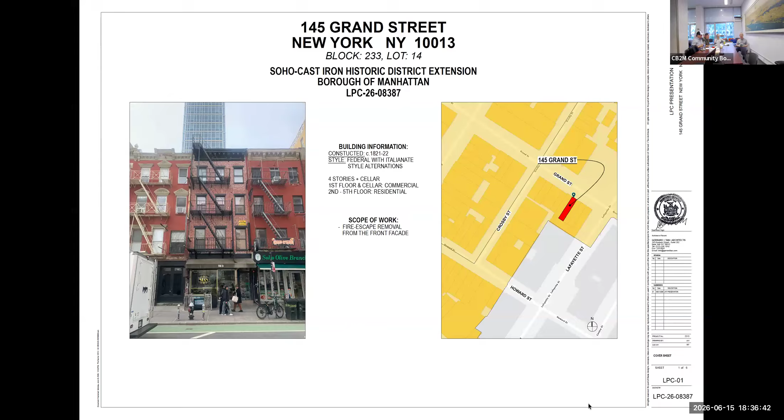We are legalizing the residential units on the 2nd, 3rd, and 4th floors. We are not doing anything to the ground floor, and we're not doing anything to the facade except for removing the fire escape. The building, under multiple dwelling law, or the loft law, states that this building, if it is fully sprinklered, which we are planning to do, is allowed to have one means of egress.

And that means of egress is the stair that is in the building. So here this shows you the location of 145 Grand.

It's in the Soho extension, and the site plan is on the right. The building was built in, I believe, 1821 to 22. It was a 2-story building, and 2 more stories, 3rd and 4th floor, were added in 1866.

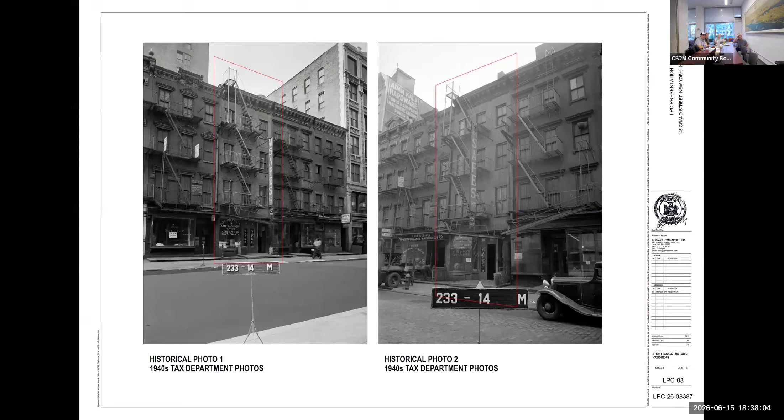At that time, there was no fire escape. Then, in the early 20th century, fire escapes were put on for safety reasons. These are the tax photographs at 145, and you can see the fire escape. The balconies, the fire escape balconies, are just simple vertical steel square sections. They're not anything ornate or designed. So there's no historical architectural features that would warrant maintaining it.

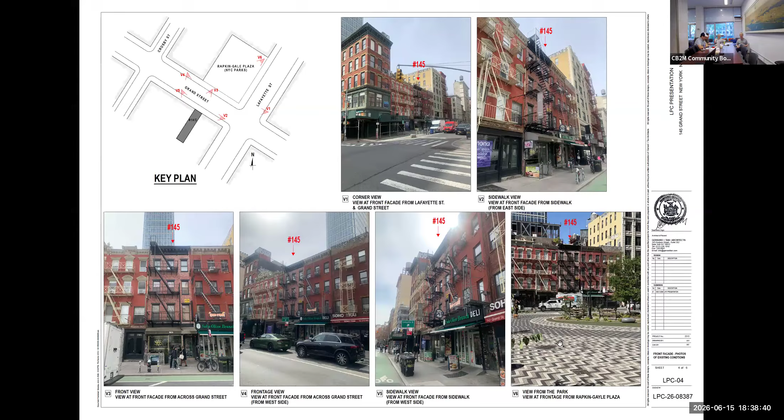And this is the current condition from the corners, from the street level, on the Crosby side street, and there is a park, Rapkin-Gayle Plaza, and we took a photograph from the furthest point of it, and you can see the building there.

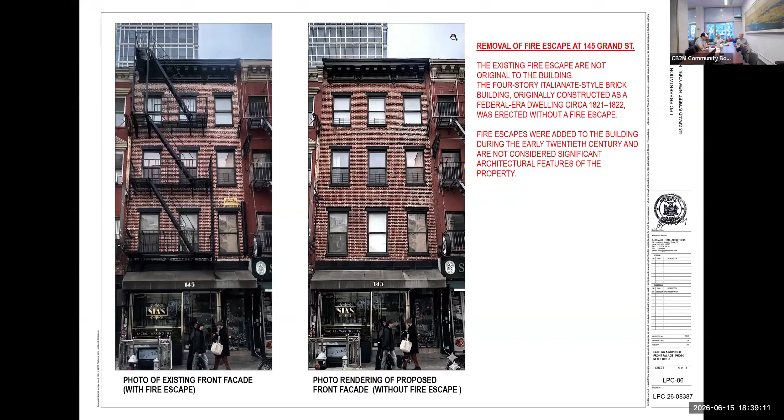This is the drawing showing the fire escape, and the removal of it is on the right. And this is a photograph, kind of photo-rendered, of the existing condition and without the fire escape. And that's it. Okay, thank you very much.

Thank you. Is there anybody in the room from the public who wants to speak about this? No, you're here for Canal Street. So, all right, is there anybody online who would like to speak or has a question about this application?

All right, Pete. Yeah, good evening. Thank you very much. I'm going to stay as a panelist. Just came up in my screen. No, you're confusing me. Okay, here we go.

I'm glad to hear the architect mention that this is an IMD building with loft tenants inside. Now, because the building is not sprinklered yet, they depend upon this fire escape for safe egress. A similar situation happened in my loft building, where we had what was said to be adequate means of multiple egress. The landlord applied to landmarks to remove the fire escape. We pointed out that it was a needed means of egress, and the fire escape remains. The application was withdrawn. So I don't understand why this landlord is making the choice to remove this fire escape when it provides safe egress to the tenants, and safe entry for the fire department.

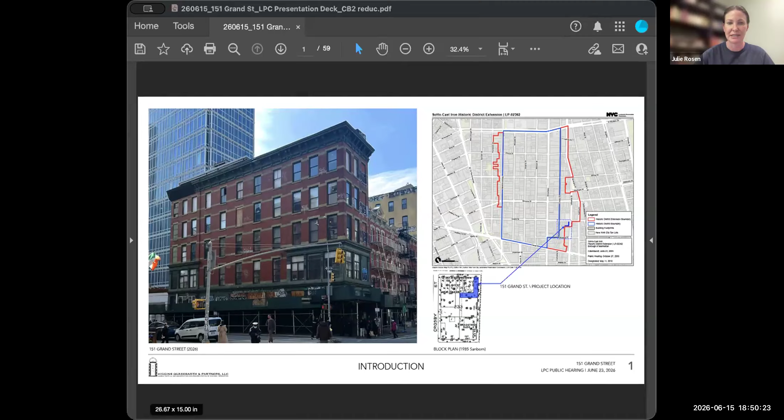So this is 151 Grand Street. You all may remember this building from our visit to you many years ago, but it's located at the southwest corner of Grand Street and Lafayette Street in the Soho-Cast Iron Historic District extension. It's a 6-story L-shaped building. It was historically a store and loft building constructed in 1889 and designed by Alfred W.E. Bloodgood and John B. Snook and Sons.

As Chenault mentioned, in 2016 LPC approved a full building rehabilitation project, which included the construction of an L-shaped rooftop addition set back from the primary facades, and a rear yard extension. Rendered views from that approval are shown here.

LPC found this project appropriate and issued a Certificate of Appropriateness permit, which has since expired, so we are now seeking the reinstatement of that permit.

Just to take you through the project timeline from when you would have originally seen this project through to today: between 2015 and 2016, the design went through a number of iterations before it was formally approved by LPC at a public meeting in August of 2016.

In January of 2017, the Certificate of Appropriateness permit was issued, formalizing approval of a comprehensive scope of work on the building, including construction of a 1-story setback rooftop addition as well as a rear yard extension to house a new stair.

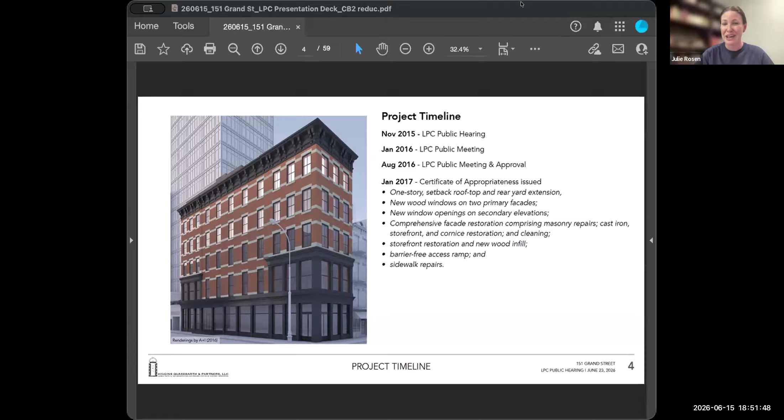The scope included new wood windows installed on the two primary facades, as well as new window openings on the secondary elevations. There was a comprehensive facade restoration scope comprising masonry repairs and cast iron repairs throughout the building, including at the storefront and cornice, as well as masonry cleaning.

There was a full storefront restoration proposed with new wood infill, a barrier-free access ramp, and sidewalk repairs. I'll take you through some of the details of those items later, but that's the high-level scope of work that the C of A approved—a really substantial scope of work, including a lot of restorative scope.

We won't require all those details because it's only the rooftop addition that's been sent to us. Well, so we are asking for—and I'll go through this—the C of A did include all of this scope, and we just want to make sure we're presenting the full scope of work to you. We are not actually proposing any design changes to the approval, but we want to make sure you see the full scope of work so we can get the permit reinstated. I understand, then I'll readjust the description of what's the case. Okay, thank you.

So in April of 2019, construction work began on the building. There was quite a bit of work completed in the first year of construction—the full building was scaffolded, and steel framing for the rooftop addition was constructed. That's relevant because I'll show you existing conditions photos with that steel framing up on the building.

All of the roof deck concrete was poured. Interior steel framing and carpentry was also installed, and plumbing work had started. But in 2020, when non-essential construction work was suspended during COVID, the project was shut down.

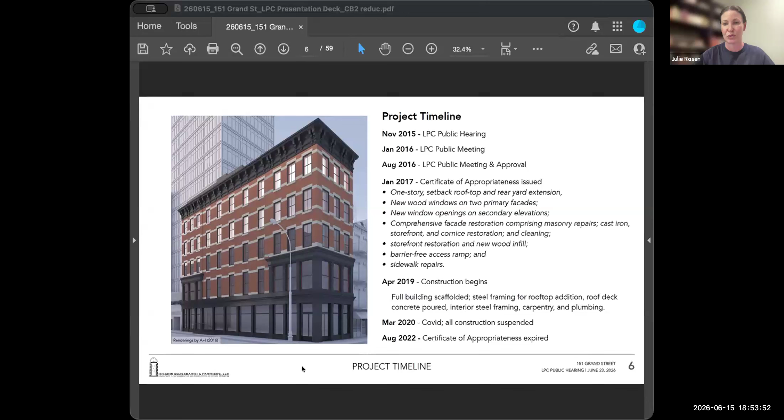The really good news is that in February of this year, the property was purchased by a new ownership entity with the goal of completing the construction per the original LPC approval. But in order to do that, we need the C of A permit reinstated so the team can pull new DOB permits and proceed with construction.

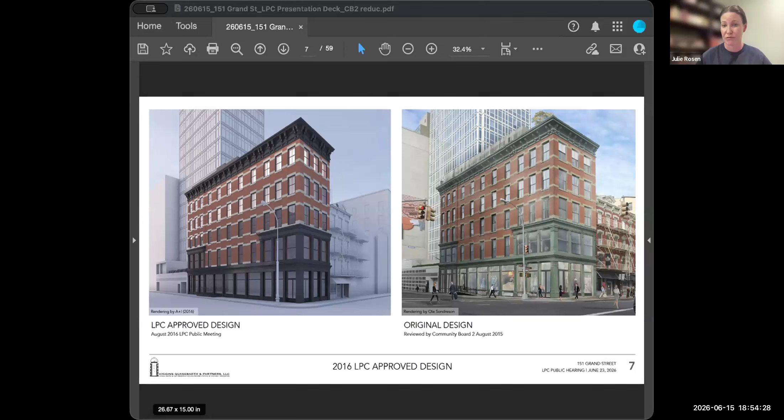The approved design, shown on the left, is what we are looking to reinstate the permit for and what will be constructed. We're not proposing any design changes. The building will continue to be fully commercial with retail use at the ground floor, and we're simply looking to pick up from where the project left off.

I just want to take you through some aerial views showing you the extent of the rooftop construction which has already been installed on the site.

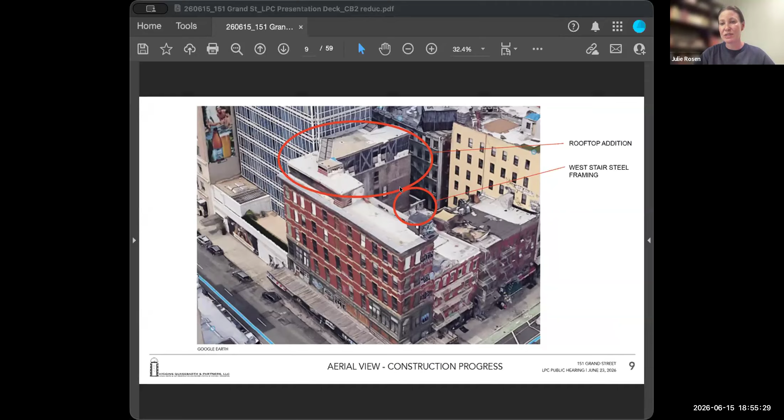So we have this aerial view, the Lafayette frontage here, Grand Street here. As I mentioned, this is an L-shaped building, so we do have visible secondary elevations here. The rooftop addition is L-shaped and it follows the footprint of the building.

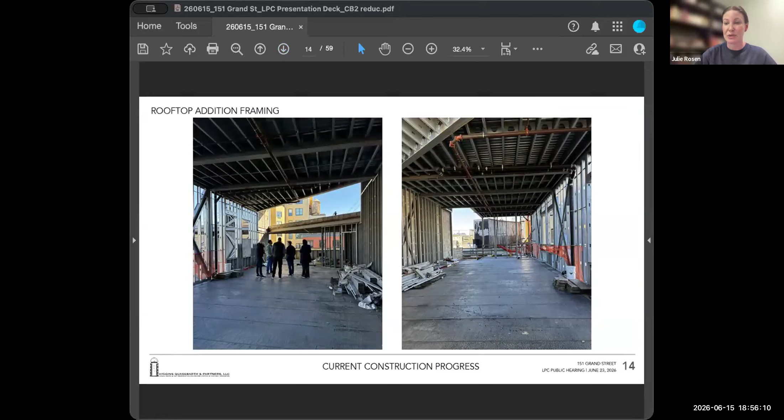These are a couple of photos from inside the framing of the rooftop addition. The project engineer has confirmed via an on-site survey and measurements that the constructed framing matches the LPC approval. So again, everything will just pick up from where it left off.

So I'll take you through quickly the approved drawings. As part of our C of A permit, there were perforated drawing sets, formal filing drawings issued and reviewed by LPC staff and perforated with their approval. So all of these drawings are forming the basis for the work.

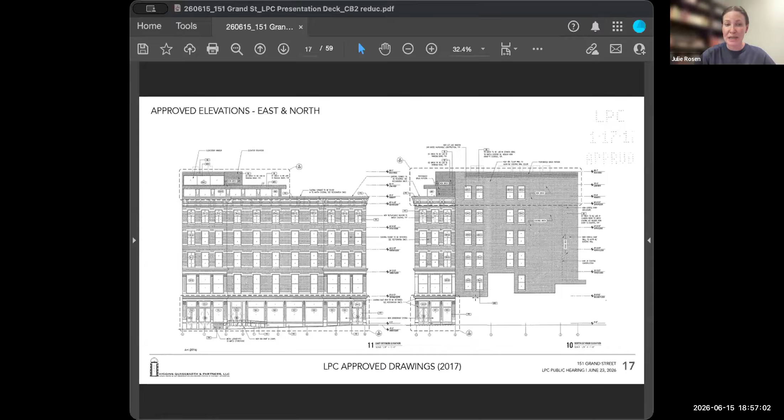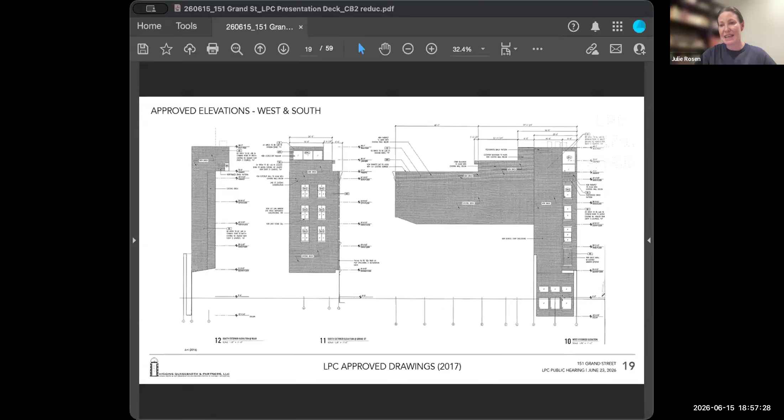In the approved elevations here, we see the new storefront infill, new wood windows matching the historic at the primary elevations. The original approval added new openings onto the secondary north elevation to add more light and air to the offices inside. And then at the roof, and we have enlarged elevations in just a bit, there's a one-story addition here with a bulkhead and clerestory on top. And then at the rear will be a new stair enclosure clad in brick.

And then at the visible secondary south elevation, 6 new window openings will be installed within the common brick wall. At the storefront, the approved scope includes new wood display windows and doors with bulkheads and transom windows, consistent with the type of infill you see throughout the historic district. The historic cast iron columns and cornice will all be retained and restored as part of the project.

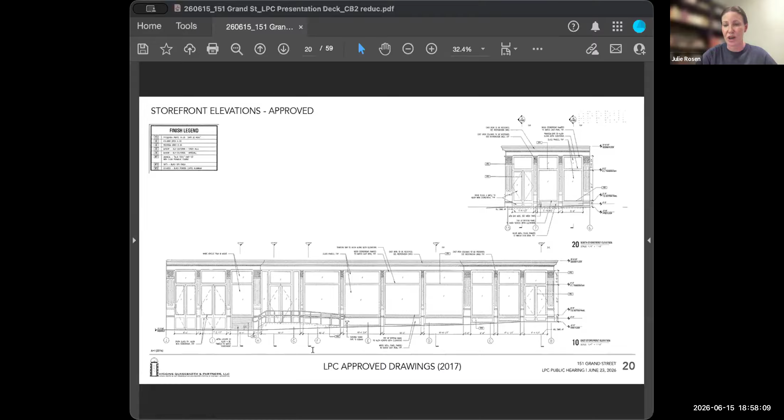And then the original commission level approval also included the installation of this new ramp on Lafayette Street to provide barrier-free access to the office entrance.

Here we have elevations of the rooftop addition. I'll start with our bottom drawing here, so this is the east facing elevation. This is what faces Lafayette Street. The addition will be clad with gray brick in this section with metal and glass infill.

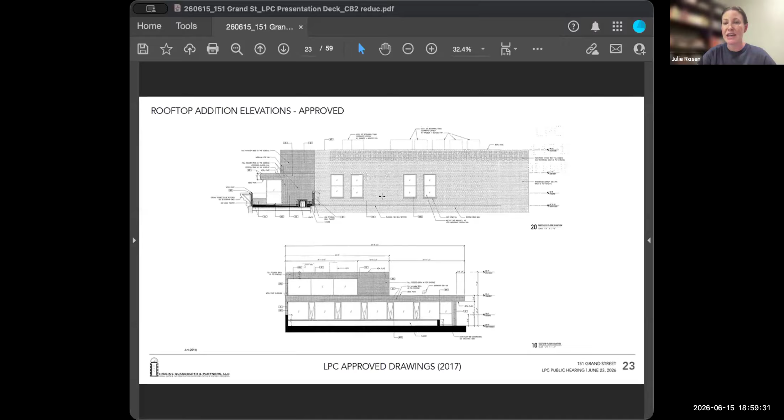On the roof is an elevator bulkhead, and then this angled clerestory that faces onto Lafayette as well. On the top here, we have the west portion of the addition. As I mentioned, in this area the addition is actually going to be a continuation of the brick wall below. So here the addition will actually be clad with whitewashed red brick to match the existing brick, and it will also have punched window openings, which are more consistent with secondary building elevations.

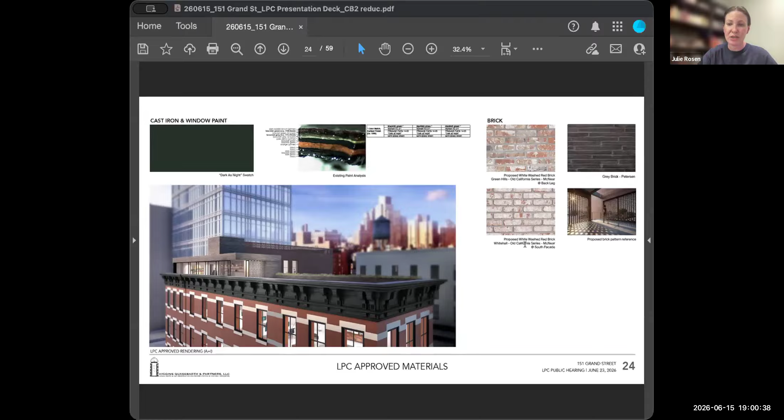For the rooftop addition, there are a few different bricks that will be utilized. For the elevations facing the primary streets, those portions of the addition will be faced with this gray Petersen brick—you can see this in the upper right-hand corner. On the secondary elevations, where the addition is rising up from those secondary walls, there will be a couple of different whitewashed red bricks utilized to get really close to the existing conditions of the walls below.

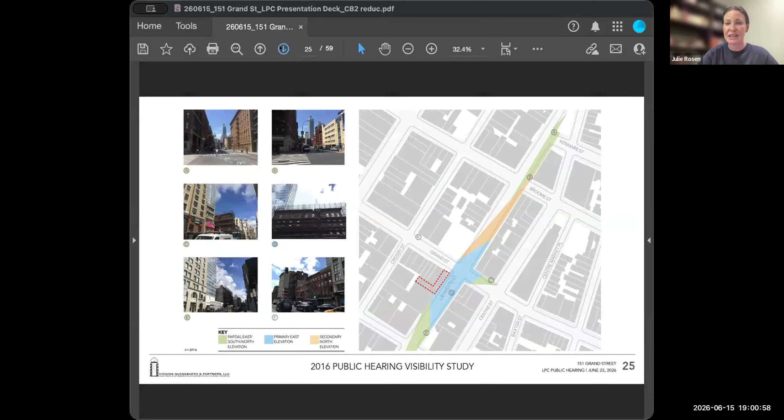We'll also quickly go through the visibility study. This was a slide put together in 2016, tracking the visibility corridor up and down Lafayette Street, but visibility is really limited over the primary elevations and primarily located over the secondary elevations. The way we've laid out these slides is that we have the public hearing approved materials on the left showing the original mock-up and a rendered view, and then on the right is our existing.

So this is our existing photo with the framing for the rooftop addition already erected. We're getting slightly less visibility in these views because the cladding isn't on the rooftop addition yet, but we're very happy to note that all of the visibility is exactly as expected and as approved when this project was originally going through the public review process.

So here's a view from the east. Again, minimal visibility over the Lafayette Street elevation. This is directly across Lafayette Street from the building. Very, very little visibility of the addition above.

This is the view from the south. There will be some visibility of that clerestory portion, as you can see here, of the addition. And then the brick wall will actually be extended up to form the south wall of the addition.

This is a view from north on Lafayette. You will not have any visibility over the primary facades here. We'll simply see the extension of the addition over that secondary elevation.

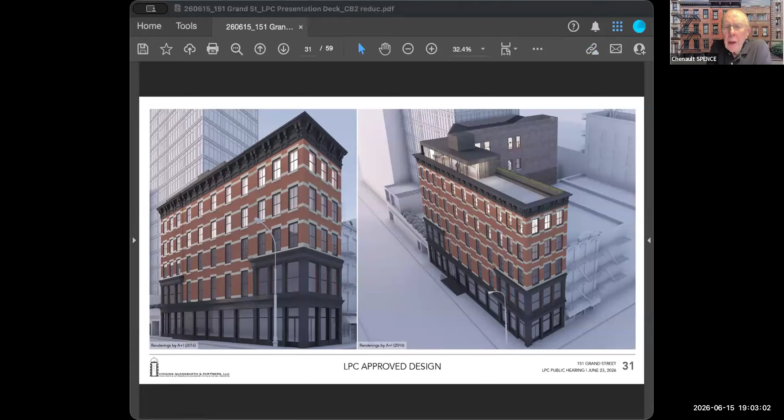So the team looks really forward to restarting work on this building. And with that, we're happy to answer any questions you may have.

Just two questions. If you could put up the slide from about 3 or 4 slides back, it showed the full view there. This one? This is with respect to the rooftop addition—this shows the difference between the application and what exists now.

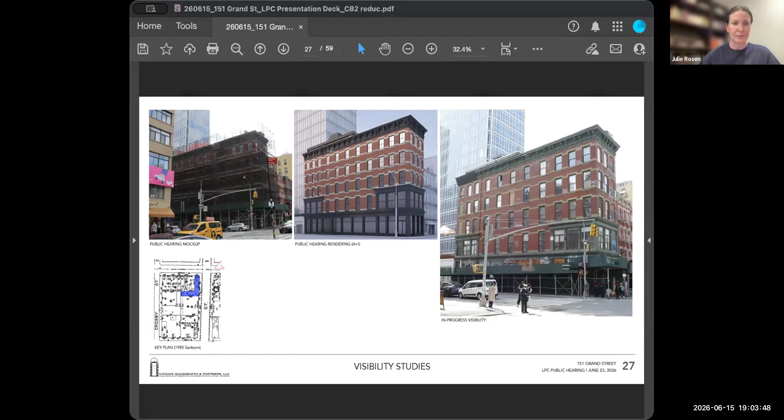Correct. Although I just want to clarify that what we're seeing now is only the framing. So once the cladding is actually installed over the framing and over the studs, the visibility will be compatible with what was approved and shown in the public hearing set. So we're not actually asking for any changes. And the brick cladding is the same, or has that been modified? Correct, it's the same—it's going to be a gray Petersen brick.

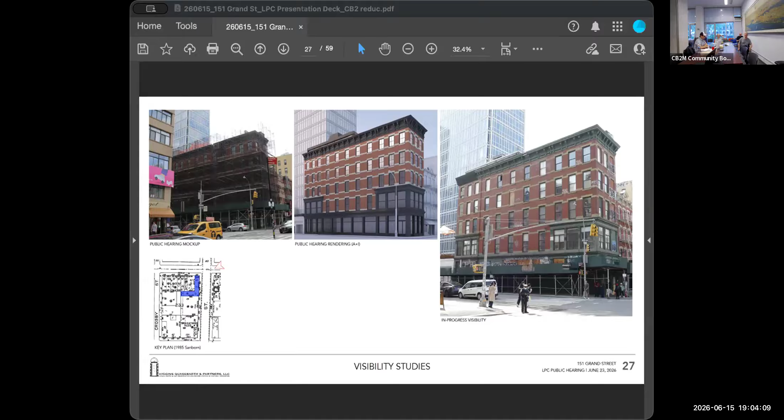Okay, are there questions? All right, anybody—the only member of the public here is Brian. Do you have any questions, Brian? No. All right, all right, thank you.

I think we'll go to Pete Davies, who's got his hand raised. Yeah, thank you. It's really great to see this building getting attention again.

Curious, if you could go back to slide 32, I think it is. I'm just curious, the windows that face south on the blank brick wall there, in the center—are those going to be built, or is that dead? Yes, the plan is to build this as it was approved.

Okay, great, thank you so much. It's really good to see this. Great, thank you.

Is there another hand raised? Oh, Laura, hi. Go on, please.

I had raised my hand just to say I wish it hadn't had that gray brick, which I think is entirely inappropriate for Soho. But it's been approved as far as I understand, so it's just a comment. I don't remember the gray brick being okayed by the community board. I just think both the shape and the color are so 1950s or something—it just doesn't fit. Thank you.

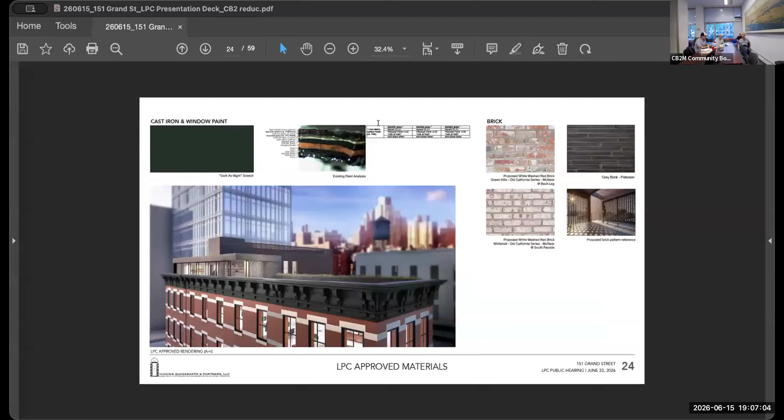Arturo: I have a question on the color study, Julie. Where did y'all get that sample from? For the finishes analysis, the existing paint analysis? Yes, those were done back in 2016. Those colors were pulled, I guess we don't have the location on there, but they were pulled from extant historic fabric on the building, including the cast iron elements at the storefront, as well as the windows—right, at the storefront level.

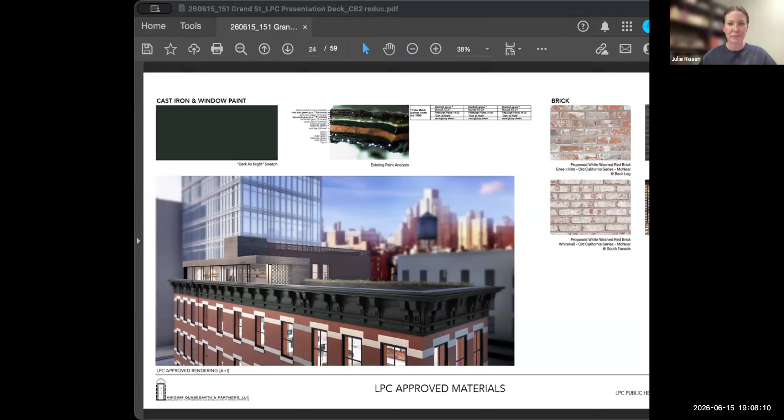I asked that because when I was looking at the pictures shown later in the deck, there seems to be a historical divergence between the top cornice and some of the paint used at the storefront levels. Oh, are you speaking to some of the pre-work photos? There's a lot of variety on the building now, but the way the finishes analysis is done, they go back to the very earliest layers. They take that sample, and this is the cross section—they go back in time, and what they found was this really dark green, almost black color.

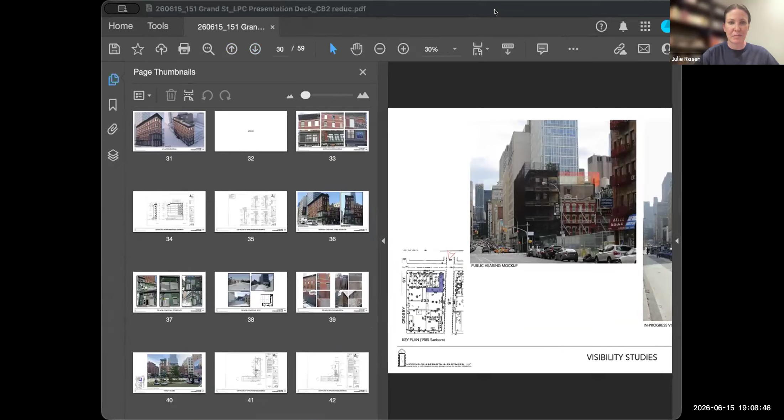Right, but I was speaking to slide 30. If you go to slide 30, there's even a seeming divergence in the paint used at the storefront level, the storefront cornice, and the top building cornice. In this view? Slide 30—this is their historical documentation. If you go further, maybe three slides—okay, we have an appendix, maybe that's what you're looking at.

We added a couple of slides to the deck, so perhaps the page numbers aren't accurate. But either way, the intent is that all of the paint colors will match and all of the storefront will match. Right, I think just looking at the more recent photos and some historical photos, this paint color looks very black, very dark—I don't really see the green in it. I think either the Lafayette green or the Essex green we've seen in other applications for this neighborhood seem a little more appropriate and respecting of the historical character. Obviously there are a number of different colors that have been applied, but just looking at the existing condition and historical photos, I think those two colors would be more appropriate.

The other thing—so there's been no construction? There was construction started because you had a C of A, and then once the construction project was suspended, there's been no construction since that period. That's correct, there's been no construction on this project since then. There were a couple of permits pulled to address some emergency repair work at the rear of the building for safety, but other than that, no work has progressed on this project.

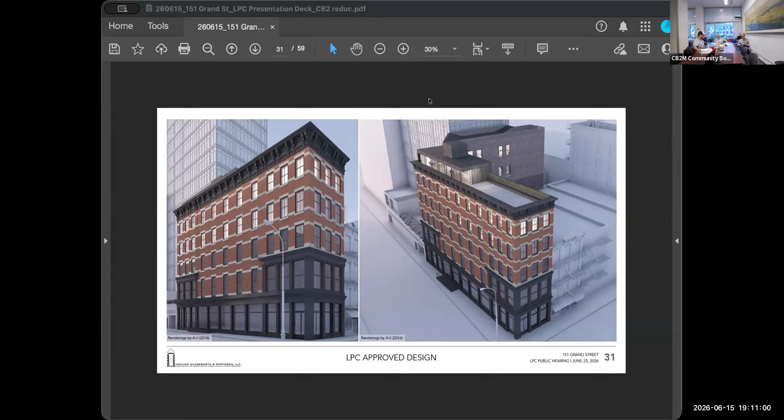I would point out there's just always the terrible problem of what renderings and photographs look like opposite the real color. Okay, thank you, Julie, great, thank you so much. I think those colors can do, have them there. Okay, we can move on.

The application is for 277 Canal Street, to create an accessible entrance to the NQRW Canal Street subway station and to vertically enlarge the existing three-story commercial building.

This was a previously heard application, and the committee recommended approval apart from some details on the ground floor and the rooftop structures.

Within the building is an important subway entrance to a station that is a confluence of the BMT lines, that's the old-fashioned term. The committee suggests, indeed encourages the applicant to incorporate accessibility to the project, and we are delighted to be reviewing this application, which does so.

With respect to the other aspects of the application, the committee will only be considering the appearance of the subway entrance. There's a great deal of information about the inside, and that is cared for by other departments.

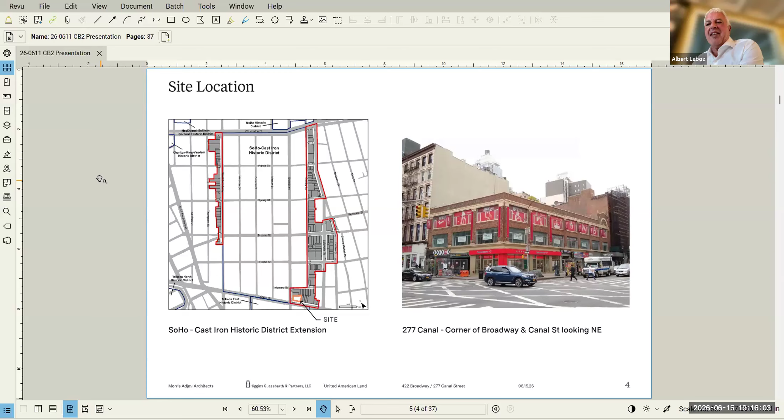Excuse me, could you make the picture full screen? Is that better? Yeah. So this is the property on Broadway and Canal. Let's go to the next slide.

We received approval two years ago. We were the first one coming out of the Soho rezoning where we received the approval from the commission to build this 100,000 square foot building. So now why are we here?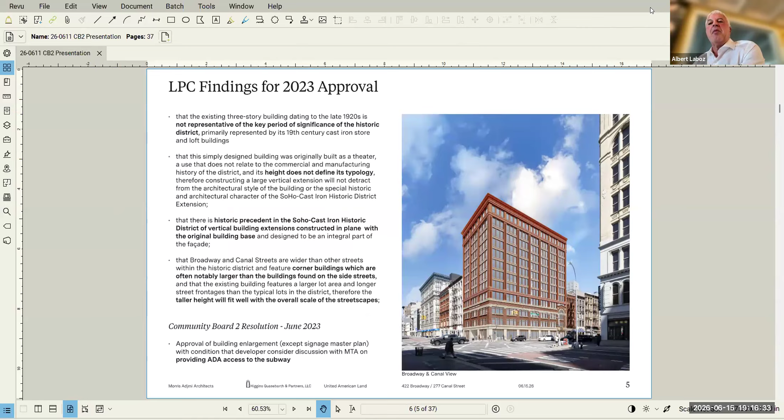After we got our approval, we received a call from the MTA, and the MTA says, you know something, the community really wants an elevator to make this accessible. And for all the time I've been in this district and this community, and we own the other two corners of Canal Street, every time I've gone to a community board hearing, I always hear that the community wants an elevator to make this station accessible. Actually, when we brought our new project, we'll show the next slide.

Let's go to the next slide. When we showed this project to the Landmarks Commission staff, Sarah Carroll and Mark Silverman, it happens that Mark Silverman told the story that he himself got off the train at this particular station and saw a handicapped person in a wheelchair with his friend. And the friend and the handicapped person said, where's the elevator? Well, there is no elevator. What do you mean there's no elevator?

Well, there's no elevator. So his friend had to carry the handicapped person up on his back for two stories, while Mark took up the wheelchair and handed it over to the handicapped person. When you think about it, and I told this to my kids, we take things for granted, where fortunately we take the stairs. This is really, really needed in the community, and we're happy to be part of this process, to put pencils down for two years and then come up with a new design.

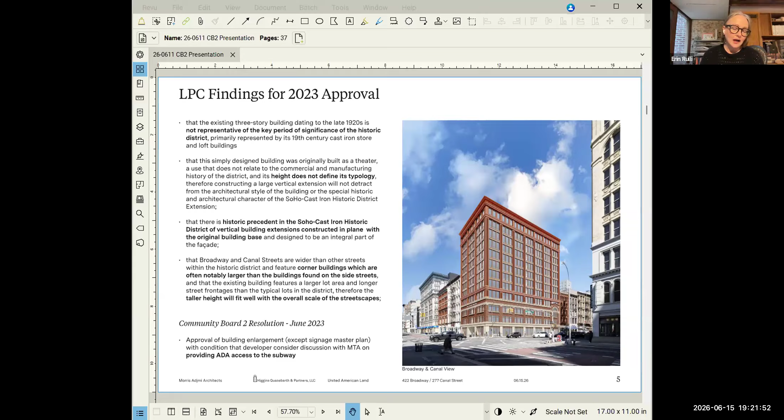But I think most importantly, when we started to explore this proposition of adding the area for the transit bonus, we realized you couldn't just take the previous approval and expand it. It didn't work from an architectural perspective, and it didn't provide value in the streetscape, in the important reading of the Soho context, and also Tribeca East to the south. So we really started from scratch, thinking about how to weave these two pieces together in a way that related more to how this building is now oriented and how it addresses the street in terms of its height and bulk and the new subway entry. And with that, I'll pass it to Christopher to walk you through.

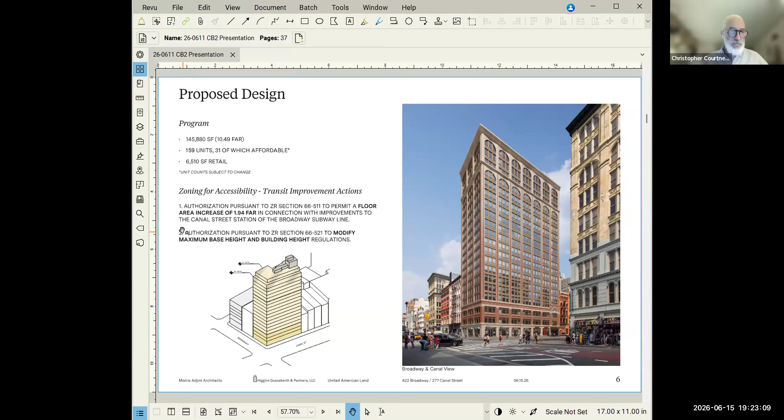Thanks. Again, Christopher Courtney with Morris Adjmi Architects. So here we have the proposed project. It's an enlargement of the existing building. It provides approximately 159 housing units with ground floor retail and much needed transit improvements, as we know. The project will be part of a merged zoning lot and also make use of development rights. The project does deliver on two major city planning initiatives from 2021: the Soho-NoHo rezoning plan, which was developed to create new housing opportunities in the neighborhood, and the zoning for accessibility, which was passed the same year, creating several zoning mechanisms to make the transit system more accessible.

So the specific zoning mechanisms being made use of for this project are a floor area increase of 1.94 FAR, and also a modification of the maximum base height and the building height for the building.

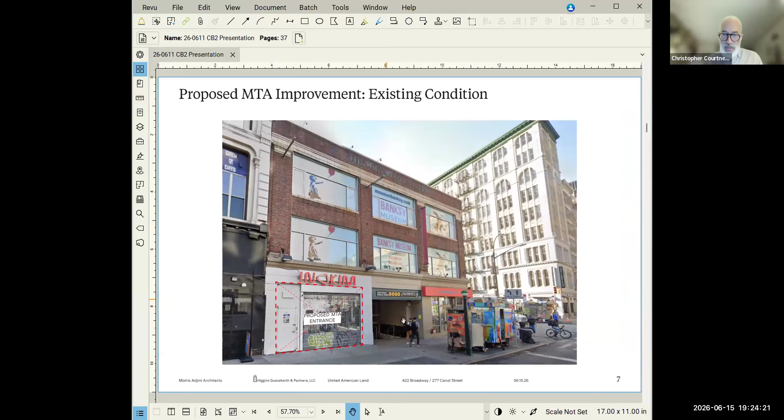So the project brings together these goals. It delivers much needed housing, including 31 mandatory inclusionary housing units. And it enhances the capacity of the subway station it sits in and allows it to become more accessible.

So I'll run through these next few slides on the subway specifically. The existing entrance today has a stair that's already in the building, with an existing easement between the building and the MTA. The proposed new subway entrance stair will be moved one bay to the north, from the center to the north.

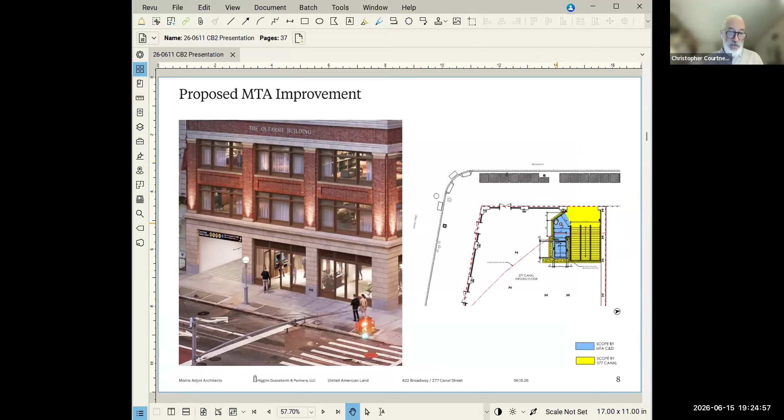On this plan, we've got Broadway at the top, Canal on the left. The existing stairs are in the center bay and get moved to the northern bay. By doing that, it allows the developer to open up space for a new elevator waiting area and elevator shaft, allowing the MTA to install an elevator here and provide accessibility specifically to the R/W northbound platform running below.

Here we have an existing and proposed understanding of the station itself. Broadway runs this way, Canal runs this way. On the left, the existing condition has a stair that comes in off the street and makes its way down to a fare control mezzanine, and from that mezzanine a few more stairs go down to the platform.

The proposed condition moves the stairs from the center to the northern bay, creating space for a new elevator. There's a newly excavated space that will be an additional fare control mezzanine, from which two portals open directly onto the platform, bypassing the additional stairs over by the other fare control.

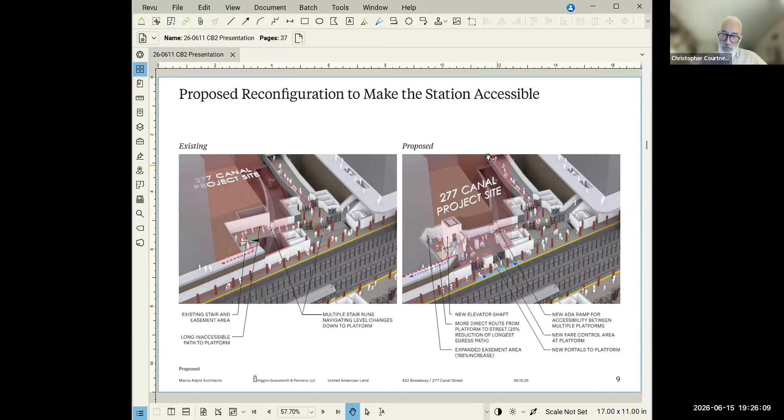Between the two fare control mezzanines will be a ramp that connects them, further adding accessibility to the station. And as it exists today, there's already a ramp that connects to the rest of the complex, with the N, the Q, the 6, and the J lines.

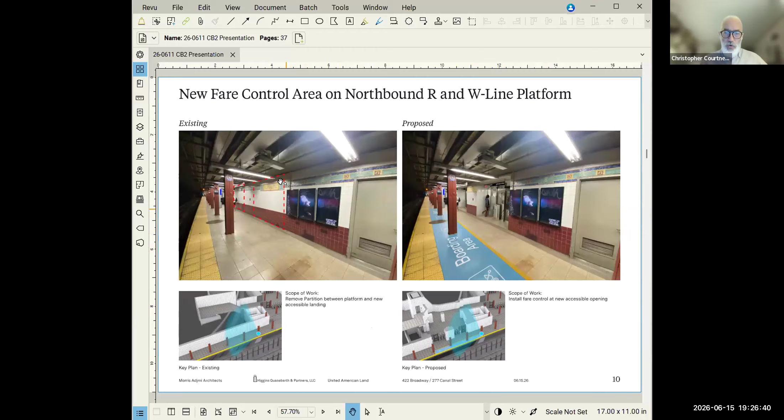So this is a piece of the puzzle that helps with the MTA's project and program here. There is an approved capital program for the MTA which they're working on, and this would be a piece of that overall station complex accessibility update.

Here we've got left and right, existing and proposed, the new portals opening directly onto the platform through the fare control mezzanine, with the elevator up to the street directly behind those portals. Similarly, the existing stairs today will be taken out and moved further north. Here's the ramp connecting the two fare control platforms, elevator in the background, portals to the platform in the background as well.

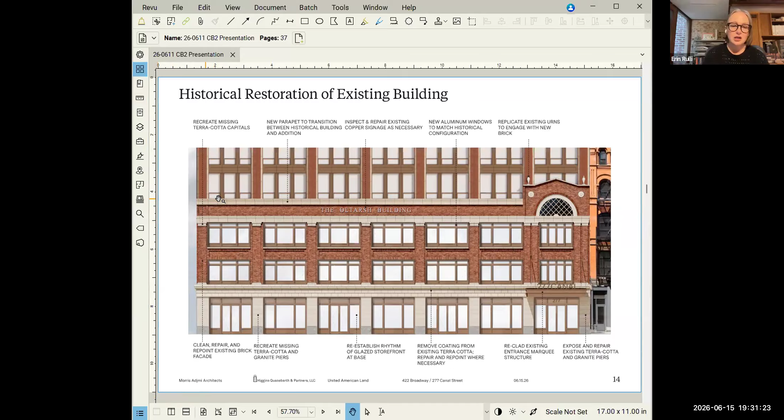In addition, the existing marquee, which is the structure from the original marquee at the building for the theater, will be reclad and reused for the residential entry at the east end. All of the windows at the second and third floors will replicate the historic configuration, that tripartite window with transoms, but in new high-performing aluminum windows. At the top of the building, currently there is just a simple terracotta coping. The proposal includes the addition of a more pronounced terracotta cornice that would act as a transition between the historic building and the new addition above. Again, that's all consistent with what we brought forward in 2023.

As part of that approval and proposal, there was a storefront master plan and signage master plan that was approved, including new contemporary infill within each of the restored bays of the ground floor. That gives flexibility for either small configurations for retail spaces or larger spaces combining display windows and entries. The storefront master plan and signage master plan allowed for a collection of signs informed by the Canal Street context.

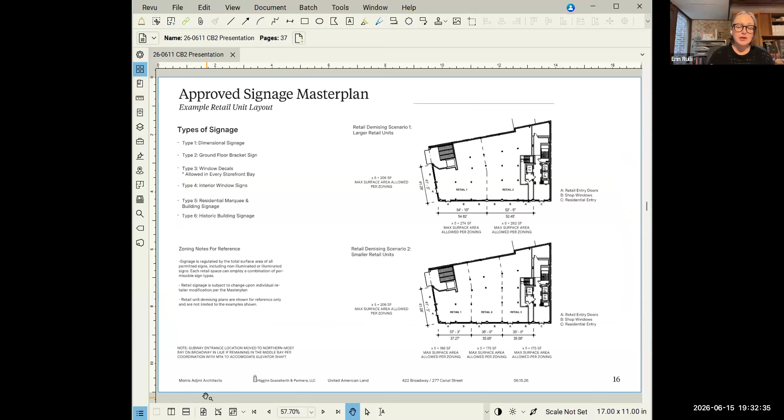It included three different signage types: internally illuminated sign band signage, projecting bracket signs, and painted or applied signage on the glazing. This is just an overview of the varying signage types and possible demising for the retail spaces on the interior. We can go back to this if there are any questions.

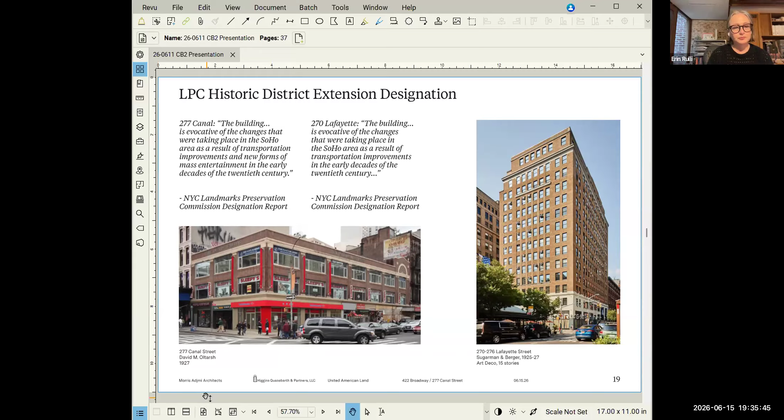That point of significance also applies to 270 Lafayette Street, at the corner of Prince and Lafayette, which is a 15-story commercial building. So it's this late period of development, of which these are essentially the two buildings, but they really show the variety of scale and character of the late commercial buildings in the historic district and provide part of the appropriateness or rationale for why a tall building could be considered on the site of 277 Canal.

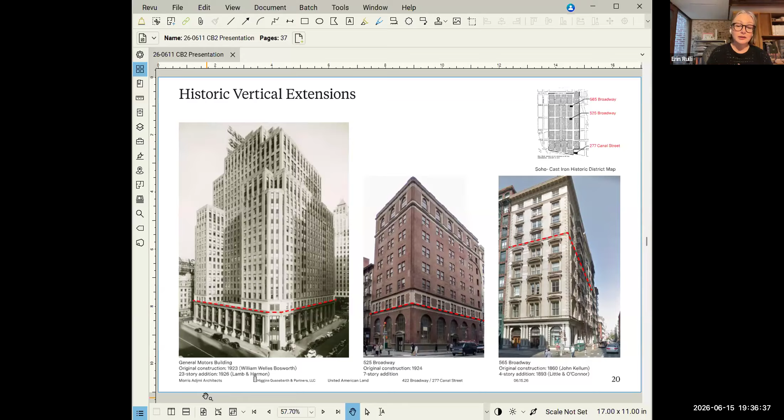And then just to touch on the vertical extension of buildings, this happened all over the city. We see that at the GM building, which had a two-story base and then the tower added to it. When the tower was added, that was actually in conjunction with the addition of the IND line up 8th Avenue, so there is a correlation between some of these extensions and the development of the subway lines, both north and south. We have two examples of buildings expanded vertically within the historic district: 525 Broadway, which was a 7-story addition on a 1-story building, and 565 Broadway, a late 19th century extension to the building at the corner of Prince and Broadway, all executed in Tuckahoe marble. This establishes a pattern for how one expands buildings, employing the vocabulary of the base, and how it can be expressed above in a vertical extension.

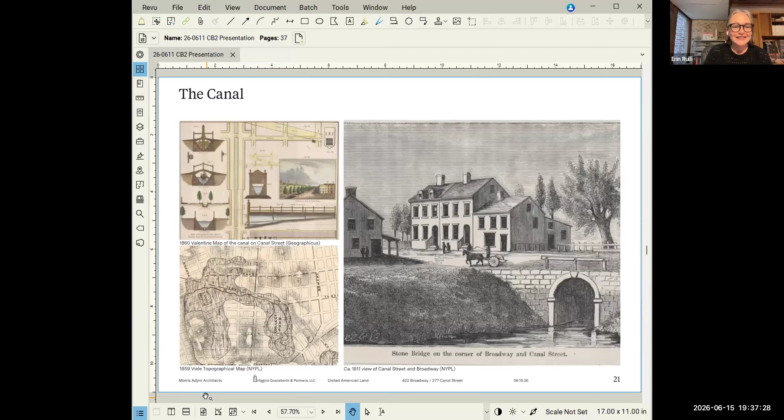Next slide. Again, very long history on the site, but it has always been connected in some way to infrastructure and transportation changes. So here's the site in the early 19th century, overlooking the canal, a major civic improvement along Canal Street.

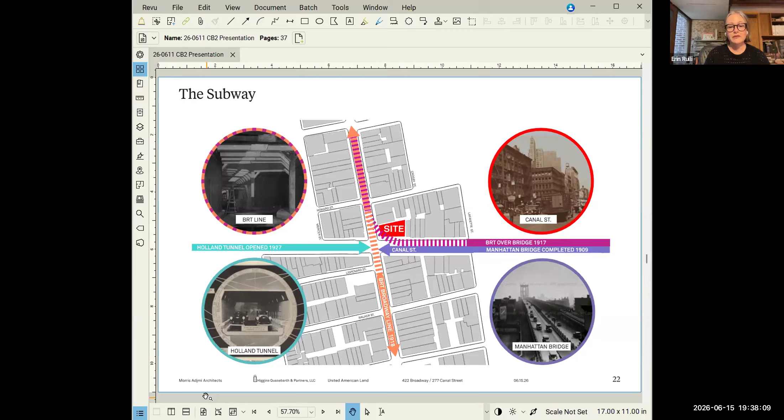And of course, the introduction of the subway. The subway connection is happening within this building, below this building, as part of the subway easement, but it's also part of a greater transportation effort that really turned Canal Street into a major interborough, interstate connection, bringing traffic across the Manhattan Bridge, the subway across Manhattan Bridge, and then the Holland Tunnel connections. So it really changed everything about the site and Canal Street during these major changes to transportation in the early 20th century.

The building was designed and constructed by David Oltarsh. Oltarsh didn't have very many buildings that he designed on his own; he collaborated with architects, including H. Craig Severance on 40 Wall Street. He did a couple of theaters and some market buildings, one of which you're quite familiar with, 837 Washington Street, which the commission approved a substantial new addition. This has become sort of an icon for inventive landmarks-approved additions, designed by Morris Adjmi as well. So there is this collaboration through time that seems to be happening, very interesting, between 837 Washington and 277 Canal. Oltarsh was a visionary of sorts.

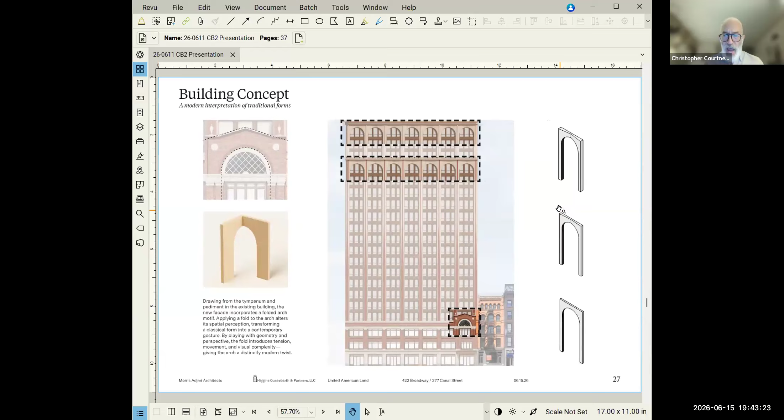So again, a little bit about the concept of using the DNA. As I mentioned, the existing building has this tympanum above where the theater entrance would have been, and we're drawing on that, the language of that arch. Arches exist in the district in these similar types of buildings as well. So we're playing off of that with a folded arch expression that gives a little bit of movement and complexity and tension.

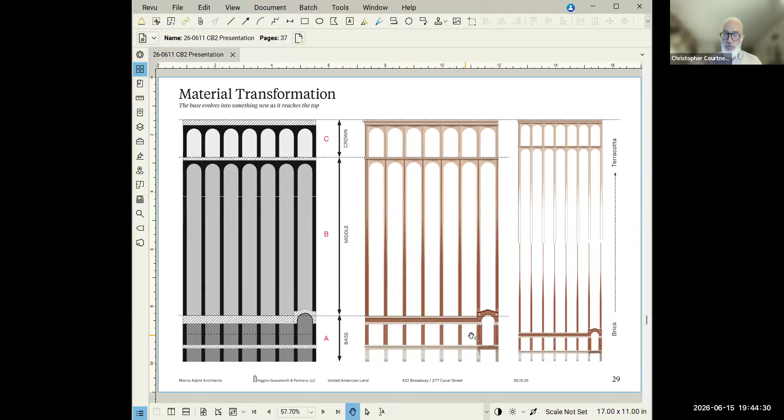There's quite a bit of depth in the facade in general. Some diagrams on the left side really express that late 19th, early 20th century masonry building typology of a very strong base, middle, and crown. In this case, we're using the existing building as the base. And on the right side, a diagram to talk about material transformation.

At the base of the building, there's a little bit of terracotta at the ground floor, and then largely the red brick at the second and third floors. So we wanted to use both of those materials. We started with a heavy brick base that grounds the building at the bottom, and then it transforms and becomes lighter and brighter at the top with this terracotta that essentially matches the base of the building.

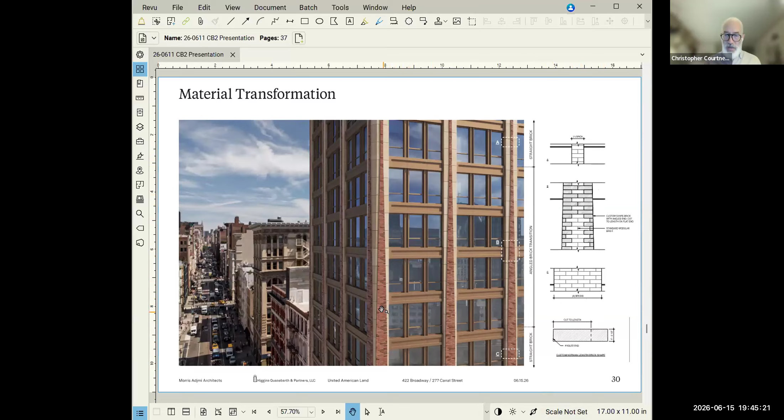Here you can see that transformation happening in the center of the building, switching from the heavier red brick at the base to the terracotta at the top. Portions of the building have a static read of four widths of brick at the base, for instance, one width of brick at the top, and then in between is that transformation where it angles up from brick to terracotta.

In all cases, the piers have that extended pilaster motif that exists at the base of the building as well.

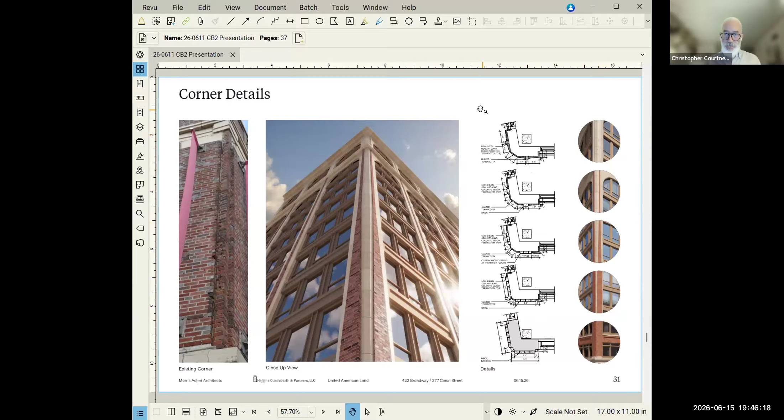Just a couple of details to break some of that down: the four widths of brick, the transition zone here, the single width of brick here. At the top of the building, the 3-story crown, that brick actually transitions fully to just terracotta, which you can kind of see here as well.

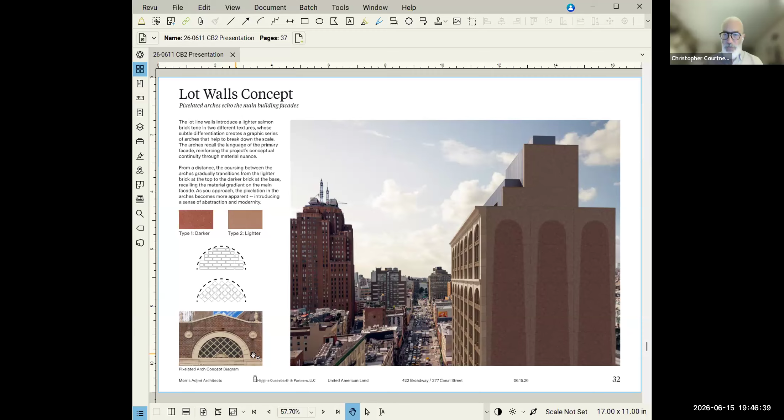So the lot line has a bit of a presence. There was a thought to break down that scale a bit with some subtle condition and motif. Again, we're pulling from the DNA of the existing building, the arched tympanum, and really just taking those new arches we've created at the crown of the building and wrapping them around. The two-toned brick is also a reference and expression of the materiality happening on the piers, moving up the building and having that material transformation happen there as well.

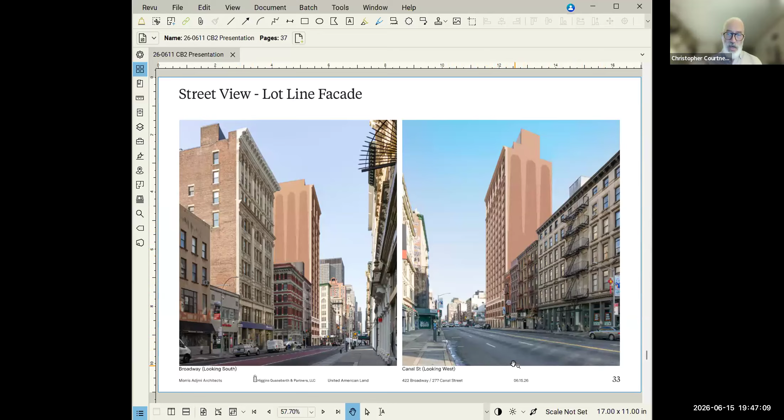Here you can see the building set within the context. On the left, we're on Broadway looking south. There's a building in the foreground that also shows a bit of a presence of a lot line, in that case all similarly constructed in a common brick.

Here on the left, we're again looking down Broadway looking south. In the distance, we can see 401 Broadway, which has a similar lot line presence and makes use of a two-toned colored brick. So this is echoing that and pulling that as a contextual clue as well. On the right side, we're on Canal Street looking west, just again seeing the building within the context.

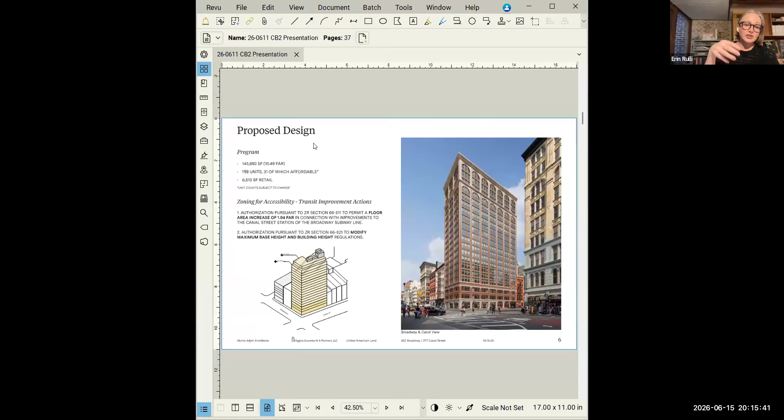So this is a contemporary addition that is threading through the materiality and the concepts, the basis of the existing building. So taking those simple profiles and extruding them up. Taking the brick, extending it up, and then transitioning. That's that sort of splayed pier line, transitioning it up so that it converts to terracotta and then becomes lighter and more open as it reaches up to the upper stories, and having a light crown, which is very typical in the district for the building itself.

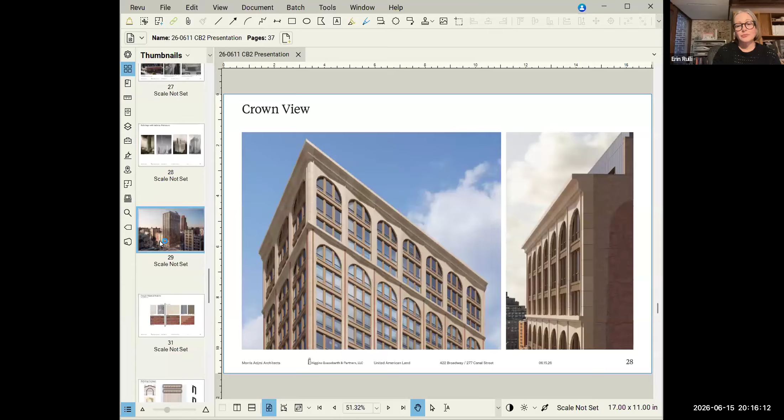And so it's essentially, instead of being an extrusion of the base building, which is the concept behind the original approach, this one transitions and creates a gradient in order to bridge the language between the base building and the addition.

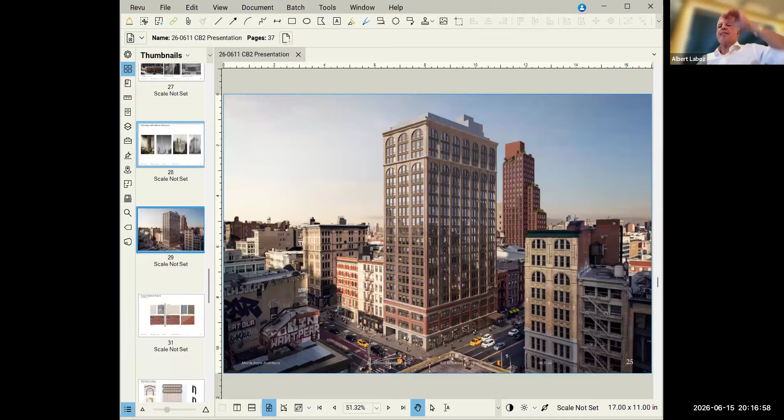And I think it is not, in my opinion, a mishmash of stylistic impulses. It is very much of this moment. It addresses the needs and the specific character of the project itself, and it's not trying to be a historic building. It is a well-crafted, well-detailed addition that interprets a marginal building on the boundary of the district. This would not be something you could do in the center of the district on a cast iron building. This is not opening the floodgates for other projects to other buildings to do this.

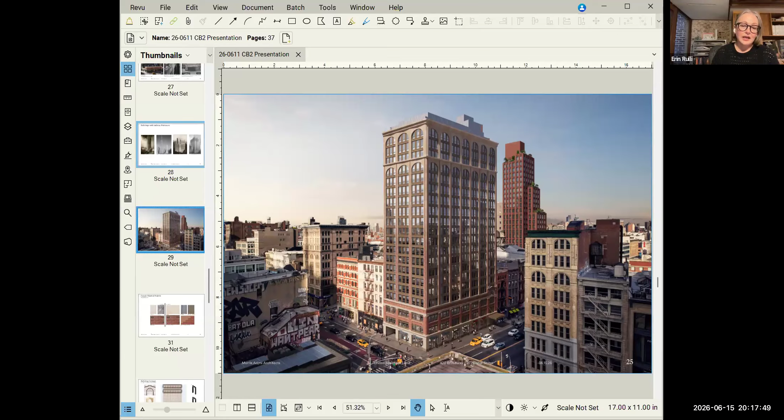The commission and your committee determined that there's an opportunity here to do something more, to provide housing. A significant proportion of it is affordable, and now accommodating these transit improvements. So it is all a combination of all of those impulses that's creating this building. It is not a single element that's being foisted upon the community. We're dealing with a way of accommodating housing to a greater degree on the site and having other civic improvements, and it is very much a kind of symbol of that effort.

Thank you, Erin. I do want to say, personally, as a committee member, I don't mind the size. I do applaud building more housing. I wish it was obviously more affordable to folks and there was more affordable housing as a part of this project. But I think if you're going to build taller, you have to do it in a way that's a little bit more respectable, or more respectful, of the historic nature of the district.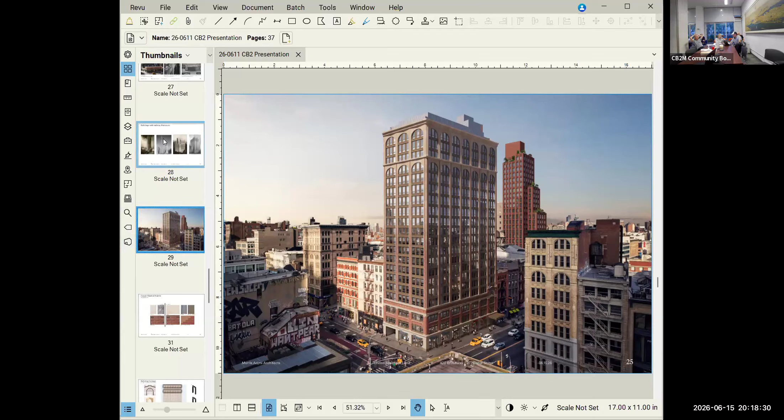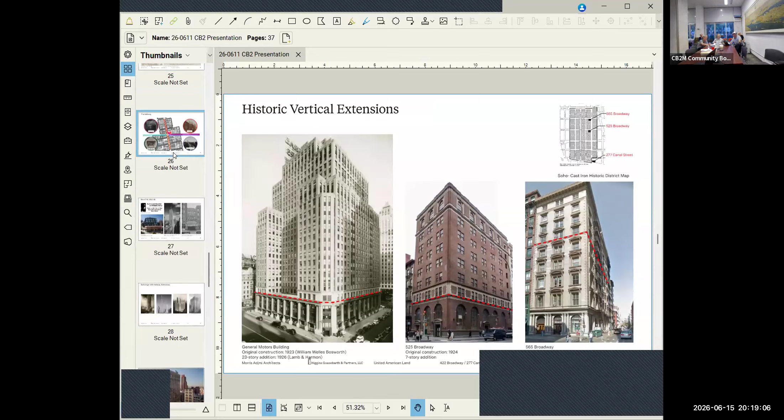And just looking at the examples that you provided, where you build atop foundational bases, it's very different between those projects and this one. And there's something to be said about the contemporary nature and maybe some artistic license, but I think that's where people start to get a little bit uncomfortable. Even just talking about the bricks, I don't really see it as a transition. It kind of feels like an erasure of the bricks, and then trying to maintain those very thin vertical pieces of brick on the top floors also seems like that's going to be a bit of a pain.

But I'd like to transition to the top 3 floor arches. Again, I think there is some precedent in that area in Soho for those arches, but those feel too big. All the other ones that you referenced, even in your references, 525 Broadway, another example is 226-230 Canal, across the street on 276 Canal, those are all 2 floors, 2-story arches. So these also feel very large. They feel unproportional with the building and with the neighborhood.

So those are just some elements where I think if you're going to go high and go big—and again, thank you for the affordable housing, thank you for the transit access—it would be great to see a little bit more respect for the historical district.

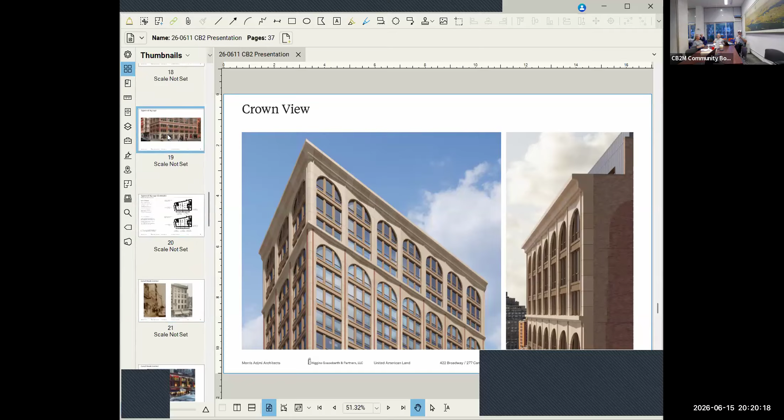Thanks, Arturo. I have another question regarding the 2023 application. The signage in the 2023 application was considerably more discreet than what's rendered in the current application, where there's kind of an anything-goes quality about what's currently shown.

There was a much more discreet amount of signage, and the discretion of that signage seems a lot more consistent with what we see in Soho than what's currently rendered. What's the difference? So you're absolutely right, I had forgotten about this, but when we went to the commission, they did not like the simple signage. They wanted something that was more expressive of the character of Canal Street.

That's interesting, thanks. I mean, where do you want to bring in Canal Street? What's Soho, what's new, what's old? It's a complicated equation. It is.

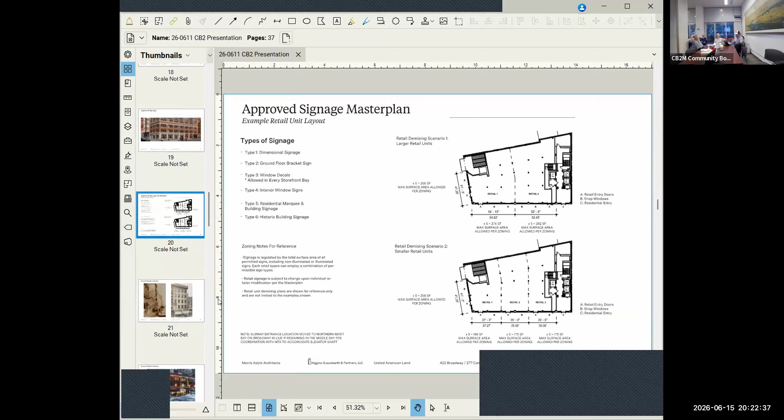We do have the broad facade along Canal, and there was a lot of discussion at that time about the multi-story layering of signage that we see along Canal Street, and how do you not allow it to overwhelm the building but still have some inherent character relating to the ad hoc nature you see historically and even in the existing condition. So this was our best effort, and of course it's just a sampling of what's possible, but it provided outside boundaries for the sign band signage, which is illuminated, and then allowed for more regular bracket signs and typical decal and glazing signage.

All right, thank you. Thanks. Are there any more questions or comments from anybody? Sean, do you have anything? We're not an executive yet, are we? No, no. Okay, I have a couple, go ahead, Chenault.

In this slide, about the subway entrance, which just got blacked out, is there a close-up of the subway entrance? It seems to be ill-identified, the subway entrance itself. How does one know? It's a good question. I think what we're following is the existing condition of signage that exists today for the subway. I couldn't see that sign. Yeah, okay, same idea essentially.

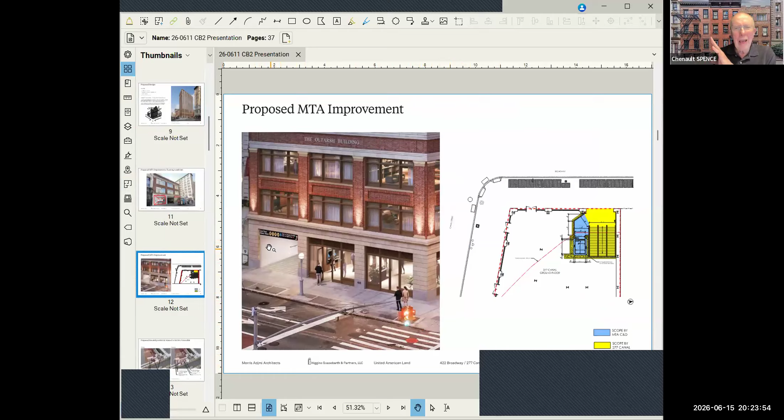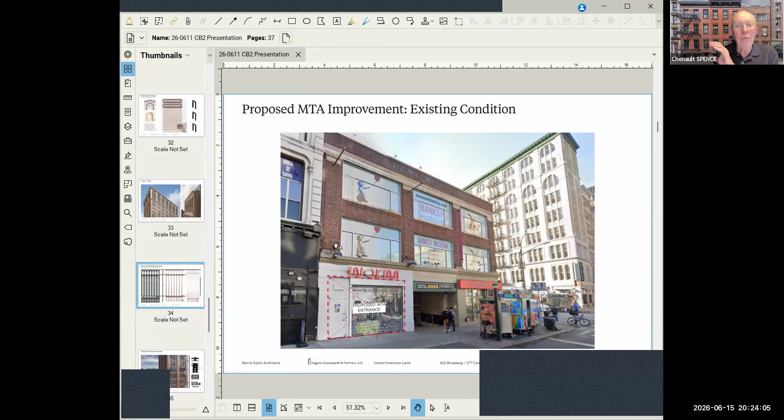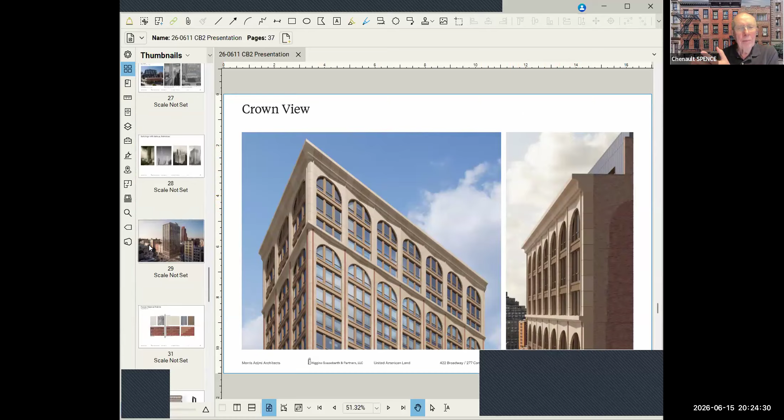I would just sort of say again about the top, particularly the repetition of the arches, that the top two-floor section somehow isn't important enough to be the top. It's separated, to be sure, but it's almost as though for some reason it was decided that was high enough, the first cornice was put in, and then the second one was put on top of it. In the way that I think one of the examples showed, I can't remember which one, it was really something heavy, more different and more important at the top.

Could you go to the lot line window rendering? Chenault, are you talking about differentiation between the top of the shaft of the building versus the top cornice and the arches? I'm talking about the top two floors. Top two floors, okay. That seems to be a cap that somehow is not capping. Got it, okay, understood.

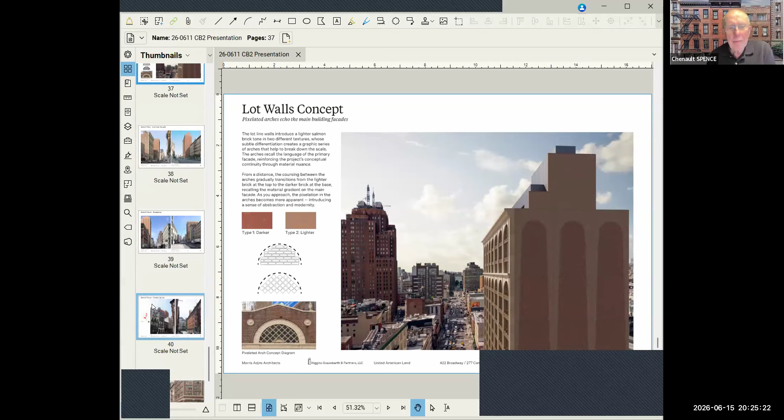Now, for all the talk of— is there a better way to see it? Like, there, that's about that. For all the talk about this building being in Soho, it's turning its back on Soho because it's a building on Canal Street that turns the corner. This just seems to loom, particularly because it's so tall.

It's come up more than once with the Soho rezoning that a tall building that reads as a skyscraper in context is a building we think of as having four equal facades, if you will. This doesn't seem respectful of Soho somehow. Perhaps a more important top would do it. I won't redesign it, but that's just the way it strikes me.

I would appreciate if you could send us tomorrow a clear chart breakdown of what we talked about for the square footage and the number of apartments of each category, explaining, if I understood correctly, that the affordable housing is based on the Soho bonus, and the additional amount from the transportation bonus does not have any affordable housing component built into it. So it's essentially the same amount if there weren't the transportation bonus—is that a rough way of saying it? That's exactly right. Okay.

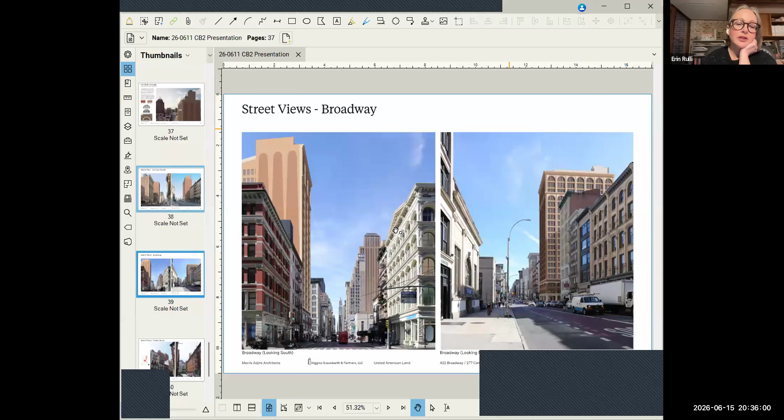Can you go back to the view to the south? The next 3 or 4 buildings are going to be demolished and another building put up. If you look at 401 Broadway in the distance on the left, that has brick patterning on the lot line because there are no windows there, and the only windows are in that first 20 feet or so where the setbacks are—that's a fairly typical condition you see on lot lines where the scale of a new building exceeds what's surrounding it.

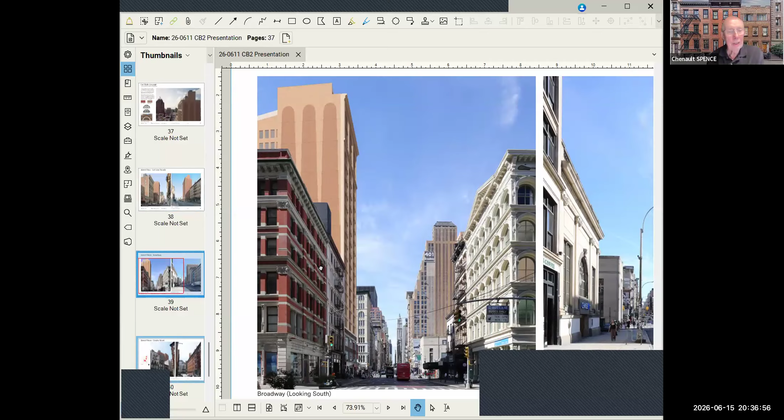That's not in Soho, but it does break things up. Just looking at it, you can see clearly the difference in terms of breaking it up versus that kind of big blank slate. I think that's what the arches were attempting to do, of course.

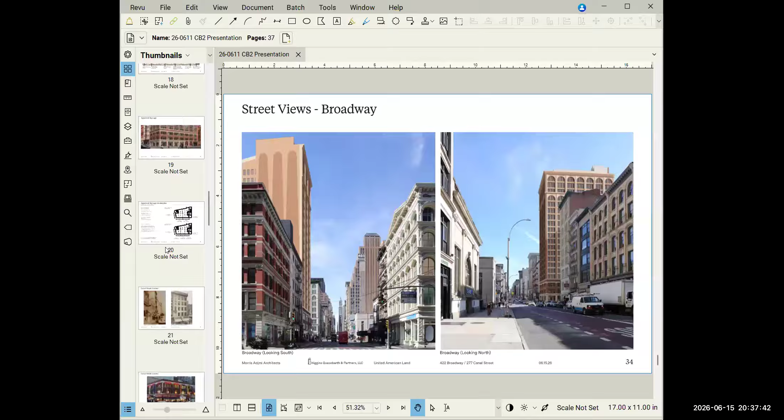Thank you. The transfer of development rights was a big surprise. Are there any other development rights from nearby buildings that have been incorporated into this development? These are the only ones.

And has that transfer been recorded on ACRIS yet? No, it's just a plan transfer. Do you know when it will be recorded? It won't be recorded until we have the approvals. The air rights transfer has to be approved? No, the new design needs to be approved. So the air rights transfer is contingent upon the approval of this plan? Of course, yes.

You live in a different world than I do. Well, thank you very much. If the commission approves the project as proposed, then they have the ability to accommodate the area of that air rights transfer. I see—it seems like there are any number of aspects of this plan that are contingent and not yet finalized, including the MTA and any number of other things.

Is that correct? They are all awaiting. It's a very complicated project requiring a lot of approvals from a lot of agencies, and we are here talking about the landmarks approval, and yes, we need other approvals. Okay, understood. So the approvals are not yet set between the agencies and the developer, and they're all contingent. Well, there's a sequence this has to go through, and landmarks, because we're adding bulk to the building, landmarks is the first pathway, and then everything else gets finalized based on what is approved at landmarks.

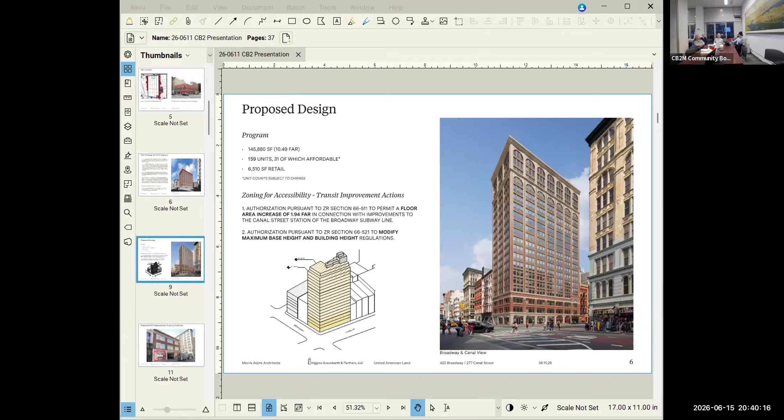Okay, and just to clarify, we were told that this is simply as-of-right, that there's nothing extra being added, that everything that's being done... Okay, but Chenault, this is how it was presented to the public by the office, that there's nothing special here, that it's all, they get it all. And that's not what we're learning. So thank you very much.